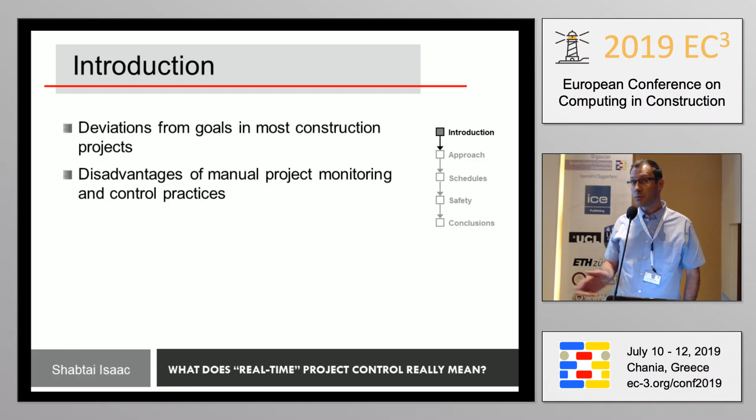And the disadvantages of manual project monitoring have been well documented. Construction managers simply cannot be everywhere at the same time. And they also find it challenging to process all the information in real time. So the end result is that very often we don't really know what is happening in a construction project in real time.

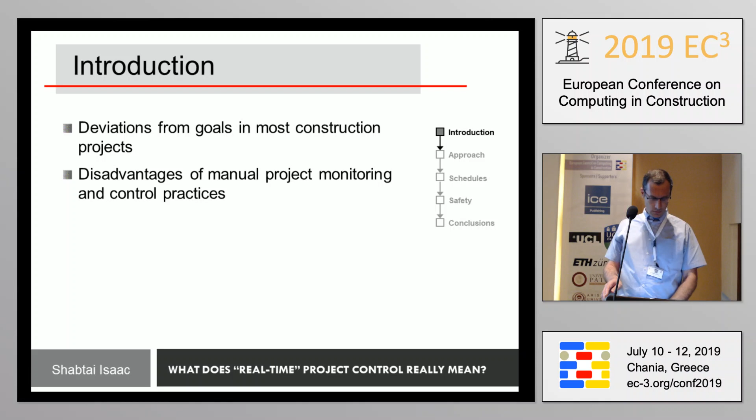What's happened? Got stuck. Oh. Slow, sorry.

Luckily, we have quite a large number of automated data collection technologies available now, ranging from RFID to cameras and image processing software and tags with which we can track assets on the site. And research into their application for construction project control has been going on for quite a number of years.

However, the actual application of such technologies in construction projects has so far been very limited. And we have to ask ourselves why, because there is an obvious need. We have solutions, but they haven't been applied, not at a wide scale.

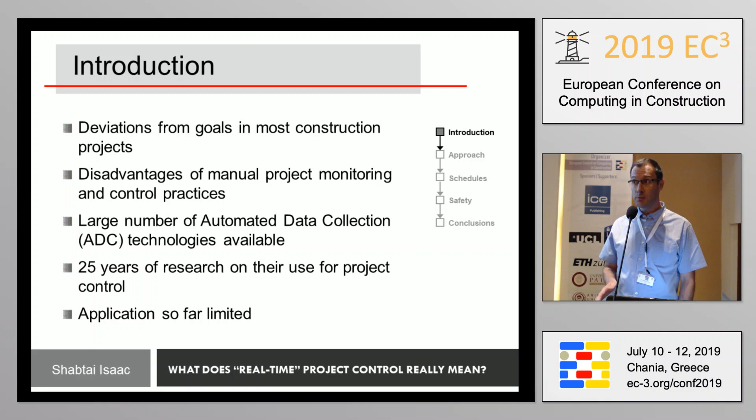So I would like to propose that this is due to something called the substitution myth. It's not a term I invented. It's a well-known phenomenon in other domains, such as air traffic control, for example. And what it says is that you cannot just simply substitute a human action with an automated action without this having a large impact on the system. If you assume this, often this automation will not meet your expectations. And this is for a number of possible reasons.

First of all, frequent changes in plans are a problem. If we automatically monitor something, we usually compare what is happening with what was originally planned. When there are frequent changes in the plan, as is happening in most construction projects, this is a challenge, and it's not a trivial one, how to deal with this.

How the automated system should communicate with human operators is a big question. When should they be provided with alerts? We've just seen the example of the Boeing 737 MAX, but it also happens in many other domains. And this leads us to the problem of data overload. It's very easy to collect lots and lots of data with automated systems, but then it's a real challenge for human operators to process all this data. They get quickly overloaded, so we have to deal with that as well.

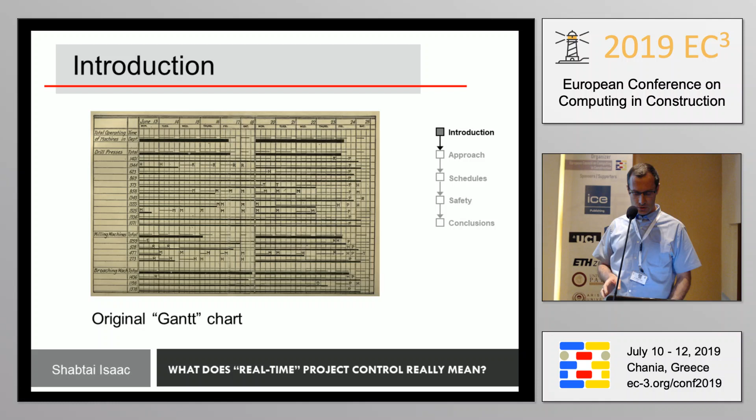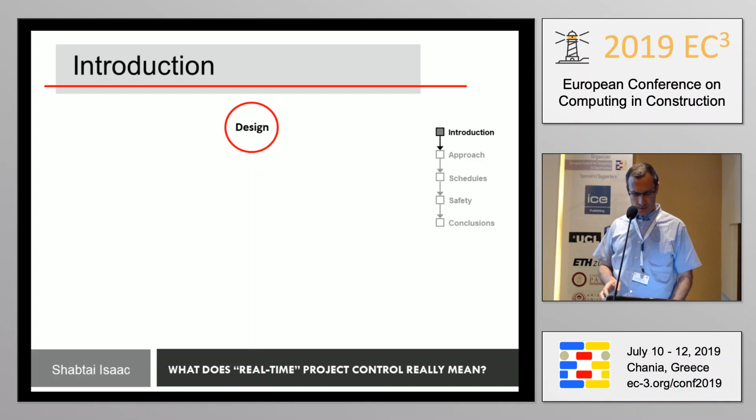And we have to, of course, understand that monitoring takes place in a quite complex process. We transform the design into an execution plan, first of all, through the product-to-process transformation. Then we can start monitoring what is actually happening on site. And then we can compare what we have monitored with what was originally planned. We can update the plan according to the as-built actual situation.

And if we find significant deviations, we can take control measures. We cannot automatically take them. We have to, first of all, analyze the impact of possible control actions on the entire project, again, by analyzing this using the plan. And if the impact of those control measures is as desired, we can actually implement them and update the plan accordingly. So we see that monitoring takes place in a very complex process, actually composed of a number of sub-processes, all of which are interdependent.

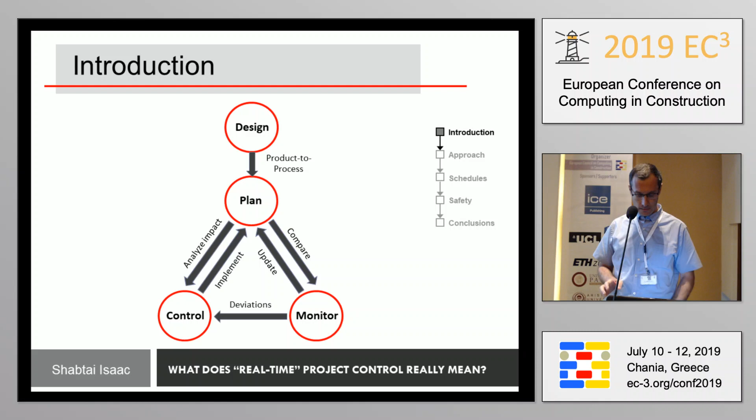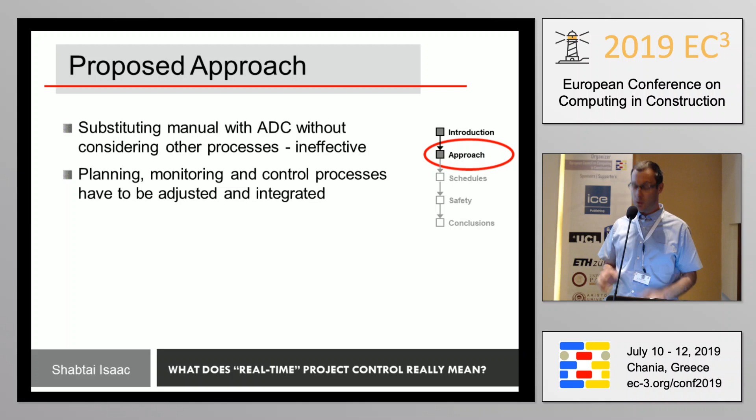So when we want to automate monitoring, we really need to consider all those other processes. If we just substitute manual monitoring with automated monitoring without considering all the other processes, this will probably be ineffective. We have to adjust also the planning and the control processes and integrate them all with the automated monitoring process.

We have to take into account data granularity. When we plan activities nowadays, we don't take into account individual components, but with automated monitoring, we usually do.

We have to take into account different time scales. We usually plan activities according to a time scale of days or even weeks, but in monitoring, we can do it at the scale of minutes or even seconds. So we have to somehow synchronize this in order to define what we really mean by real time.

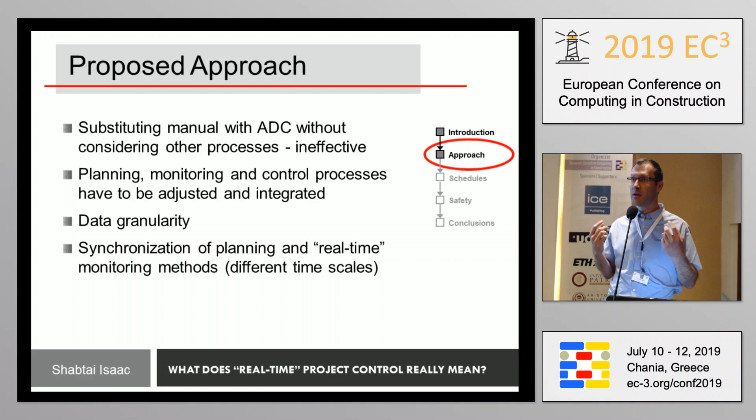I would like to pose a number of questions that we need to ask ourselves before we decide how to do automated monitoring. What information do we actually need for control purposes is the first question. The second question is, what kind of data can we collect with our automated technologies?

Right, there's some delay, yeah.

The third question is, how can we actually process this data in real time in order to provide us with the information that we need? And how should we revise accordingly, not just the monitoring process, but also project planning and project control?

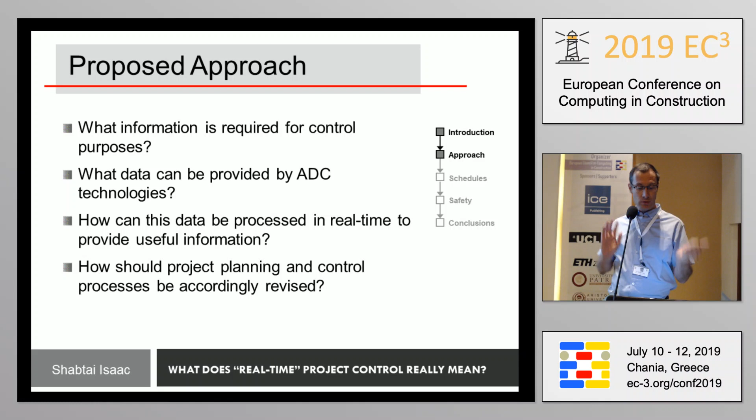The approach I would like to propose here, which I try to apply in different domains, is first of all decomposing the project into certain segments, which should preferably be minimally interdependent. So I try to divide a project into certain segments which can be easily controlled.

Then we need to define certain control points at the interfaces of those segments, because when something goes wrong, when there's a certain deviation in a specific segment, we want to prevent this deviation from spreading, from having an impact on the entire project. That is the approach.

And then we can carefully monitor the status of those specific control points, which are of interest to us, and of course provide alerts when there are significant deviations at those control points. So that's the approach.

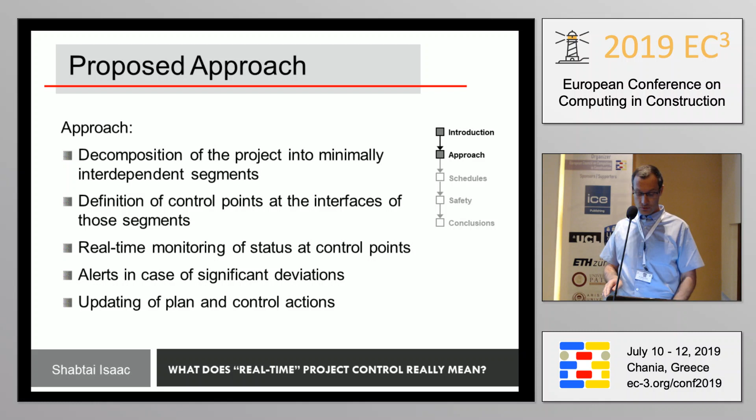Of course, following that, we can update our planning and control actions. I would like to give you a brief example of an application of this approach—actually, two examples in two domains. One is schedule control, and the other is safety control.

So in scheduling, we usually present our schedules using these Gantt charts, which I showed earlier, but we actually plan our schedules still using the critical path method, a method which hasn't changed for almost 60 years now.

And in the critical path method, we usually assume constant production rates for each activity. We define activities according to their endpoints, the start and the finish of each activity. And we define relationships between activities only at those endpoints: finish-start, start-start, finish-finish relationships, and so forth.

So what that means is that basically, critical path method ignores everything that happens during the execution of an activity. Any mid-activity deviations are not relevant. We can collect data on them, but we have no use for them in scheduling. We cannot formally incorporate such data into our schedule. And this is, of course, a big problem.

Automated monitoring won't help if our schedule is planned according to the traditional critical path method. So what can we do? Well, okay, so this is the current situation.

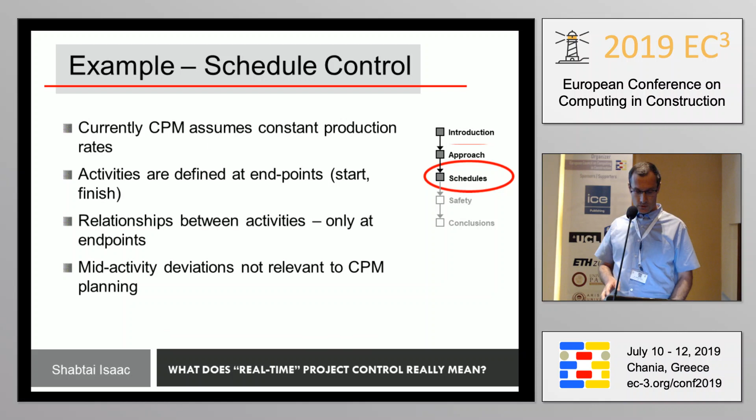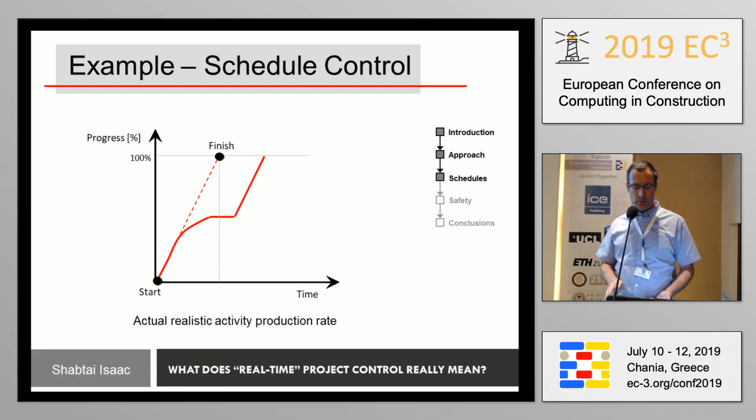We plan an activity according to a certain ideal constant production rate. Well, we know that in practice, the production rate will differ, and we can actually know in advance already how it could differ. We might have a learning curve, we have different conditions during the execution of the activity.

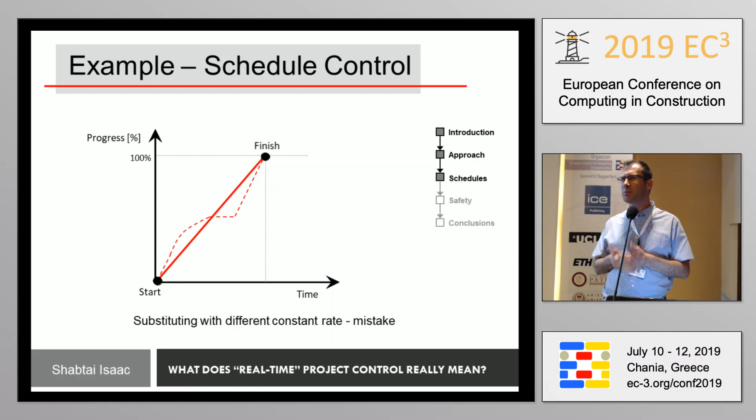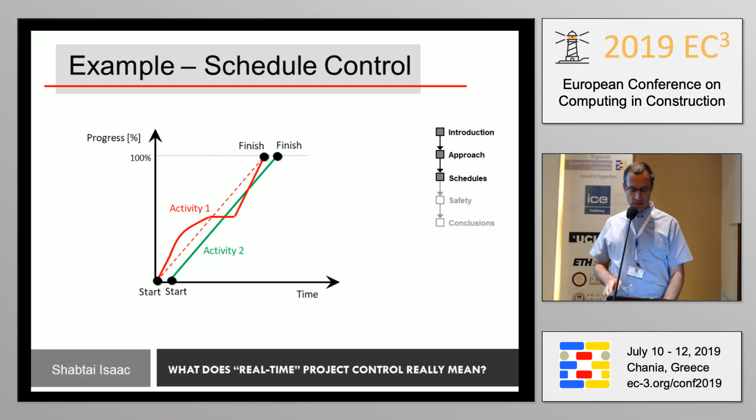And of course, we could then have a situation in which the activity in practice will take longer, but simply replacing our originally planned activity with the longer one, which also has a constant duration, production rate, will be a mistake. It won't solve our problem because in such a case, if we have a successor activity, this might still cause certain problems regarding, for example, mid-activity collisions.

So we have two activities related to each other with endpoint relationships, but any mid-activity collision will be simply ignored in the critical path method. So how can we solve this? Well, what we can start to do is divide our activity into certain segments.

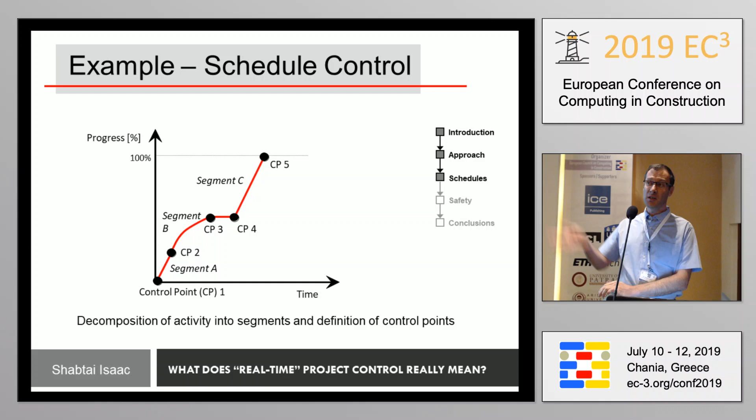And we can define control points at the beginning and end of each segment. For example, each segment will have a different production rate. Or even if they have the same rate, we can define certain control points at certain intervals.

And then we can do that also for successor activities and connect all the control points through point-to-point relationships, which are mid-activity relationships. I won't go into technicalities because I don't have the time, but I would like to stress that this is not the same as simply dividing up an activity into lots of smaller activities.

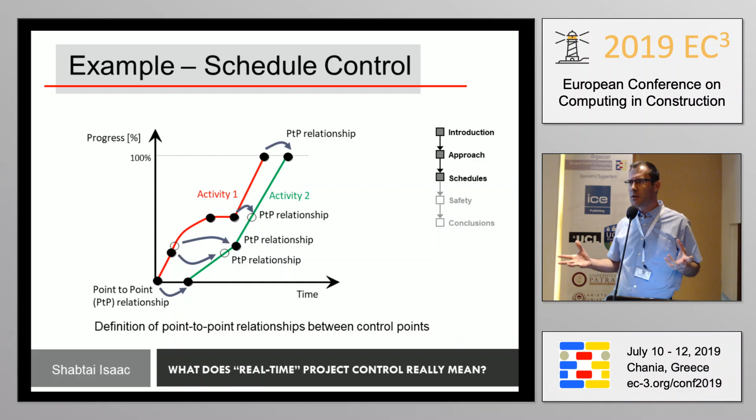Because if you have a project with hundreds or thousands of activities, that would mean having a schedule with tens of thousands or hundreds of thousands of activities. That's not manageable. But this is manageable. And using such relationships and such control points, we can carefully track the status of activities at the control points

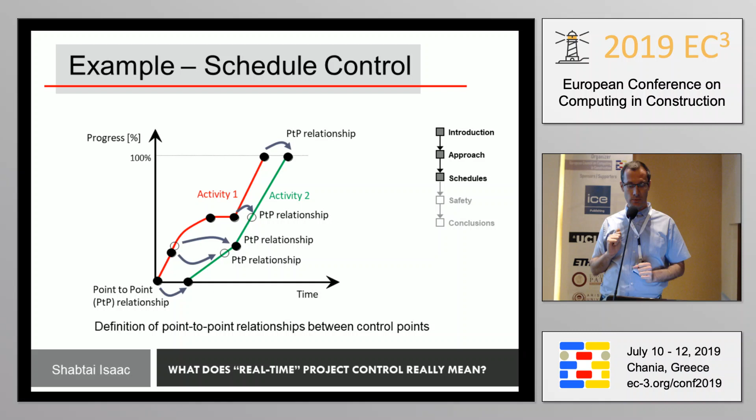Another example, safety control. So there has been a lot of research on safety control and how we can improve it using automated tracking of assets on site, equipment or manpower, in order to prevent, for example, workers from entering high-risk areas, which we have defined and identified in advance.

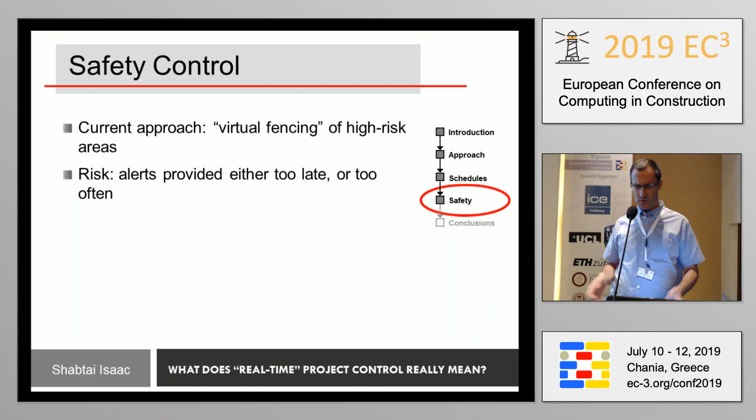And we do that using virtual fencing. So we have certain alerts whenever a worker enters a high-risk area. But usually these alerts are provided either too late, when the worker is already in that area, or if we're more conservative and we enlarge the high-risk areas, the virtual fencing, they will be provided too often, then those alerts will simply be ignored. So what can we do?

Well, with automated data collection technology, we can support proactive alerts. What we did was we developed a probabilistic model with which you could actually identify when the safety risk exposure of a worker is excessive in terms of space and time, whether he's moving too close to a high-risk area or he's staying too long in a certain location where there are safety risks, not just deterministic alerts when he's already in an unsafe area.

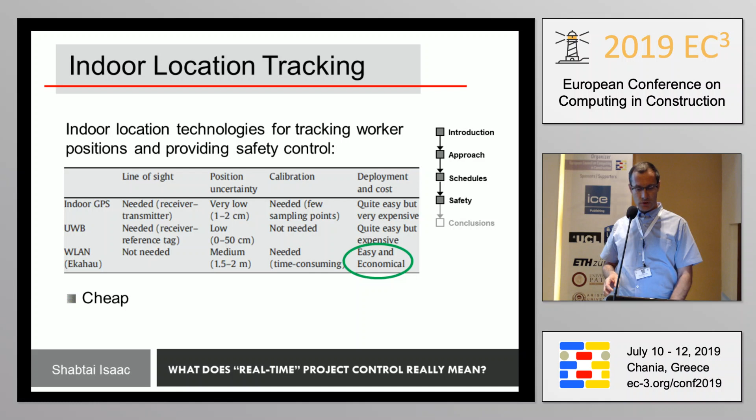We applied it using Wi-Fi technology, which is cheap but relatively inaccurate. We had an accuracy of plus minus 2 meters, which is not a lot, but we managed to compensate for that, using a probabilistic model in which we didn't have just high-risk areas for which we provided a deterministic alert whenever a worker enters them, but also medium-risk areas. We could actually track the location of the worker in this medium-risk area.

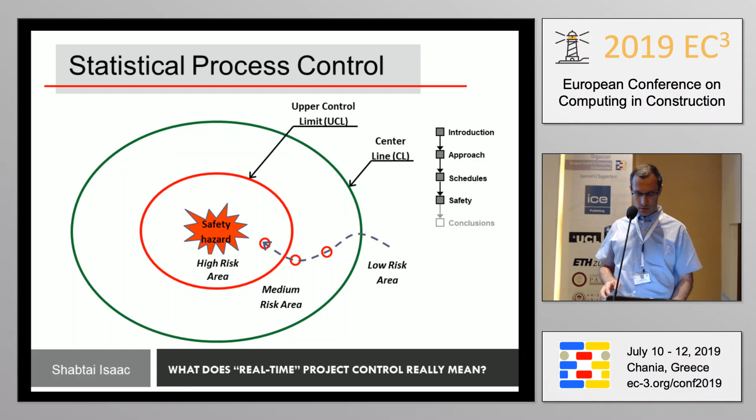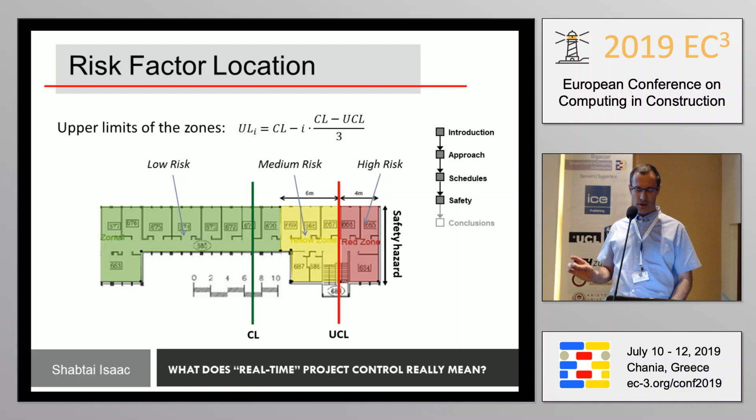We could define for each such an area certain probabilities. The lower the risk, the higher the probability that a worker will be located in such an area. In a high-risk area, you want a very low probability.

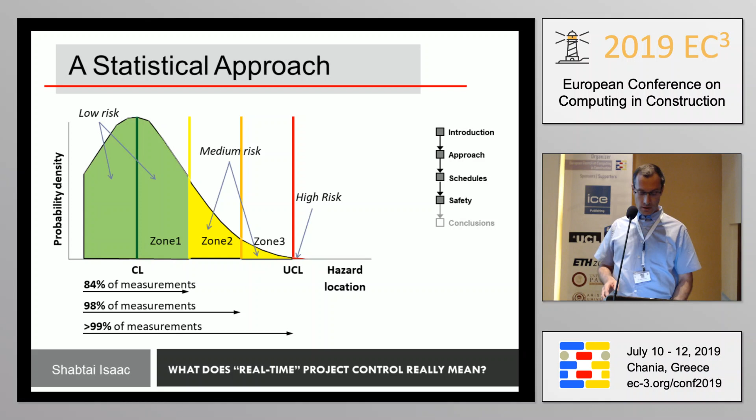And then we define certain probabilistic decision rules with which you could automatically identify, for example, such an upward trend, which means a worker is getting closer and closer to a high-risk area. We want to provide an alert, even before he enters it. For example, if there's an unprotected ledge and he can fall off it.

Or we could provide an alert and just look at those data points, ignore all the others, when a worker is for too long a time in a medium risk area. For example, there's noise there and he's not protected.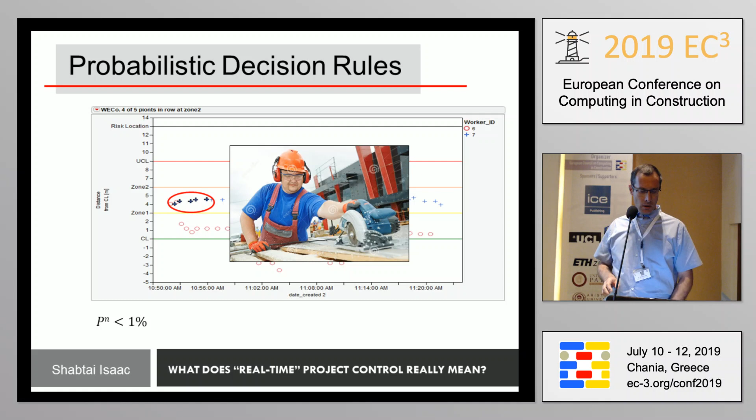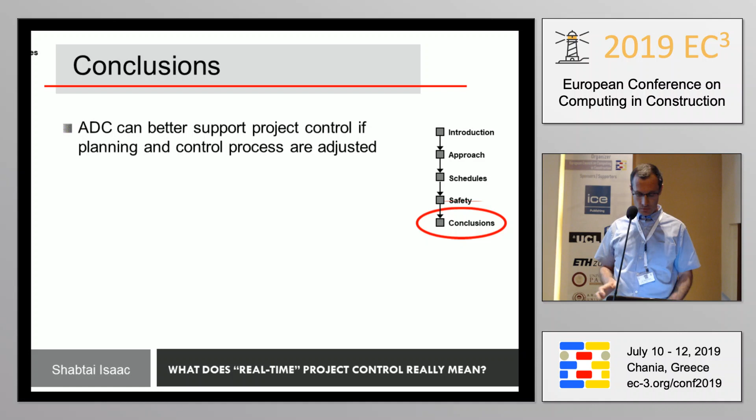So, to conclude, the proposed approach is to adjust planning and control processes in addition to the monitoring processes in order to support automated data collection. And I try to do this by decomposing the project into controllable segments, according to each domain, of course, and define certain control points at the interfaces of those segments, which we then carefully track. And we warn whenever there's a significant deviation at those control points.

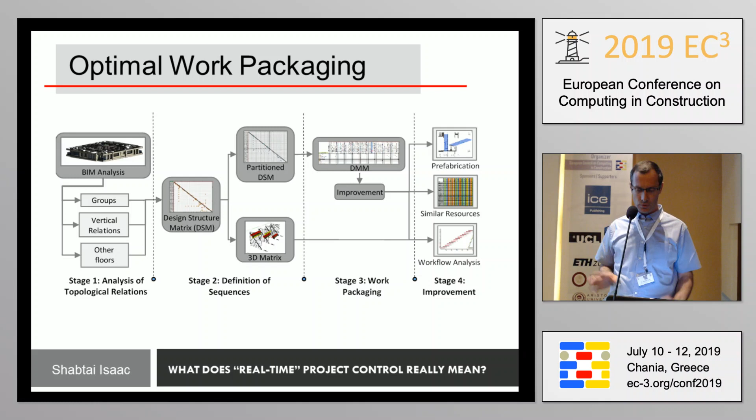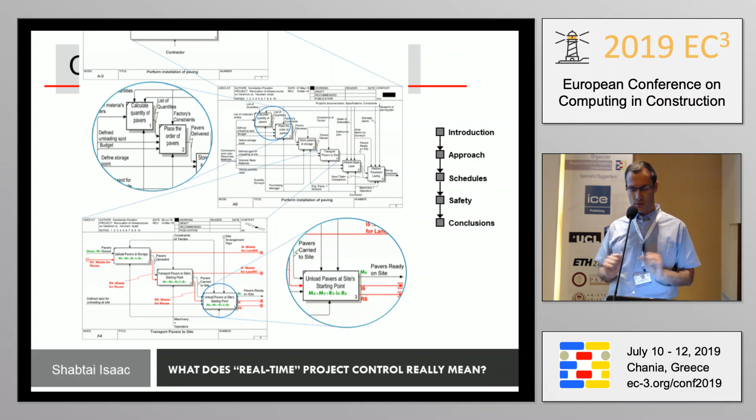And I've done it in other domains as well. Here's an example, work packaging. How do you divide the project into work packages that are relatively independent and control their interfaces? Or waste control. How do you identify specific actions in each activity which are causing the waste and then controlling them, tracking the inflow and outflow of material in those actions. That's it. Thank you very much.